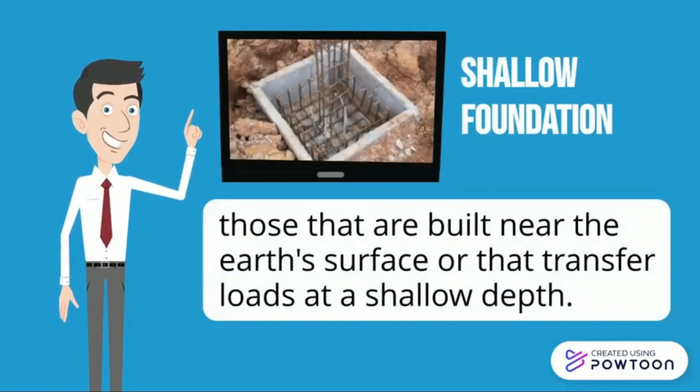Then we go to the definition. First, shallow foundation. Shallow foundations are those that are built near the earth's surface or that transfer loads at a shallow depth. Deep foundation refers to a foundation that is buried deeper or distributes load to a deeper strata. Then we go to their characteristics.

The first aspect that we consider is feasibility. The shallow foundation is easier to construct, while deep foundation has a more complex process. Next, the mechanism of load transfer: shallow foundation transfers loads mostly by end bearing, while deep foundation relies on both end bearing and skin friction, with few exceptions like end bearing piles.

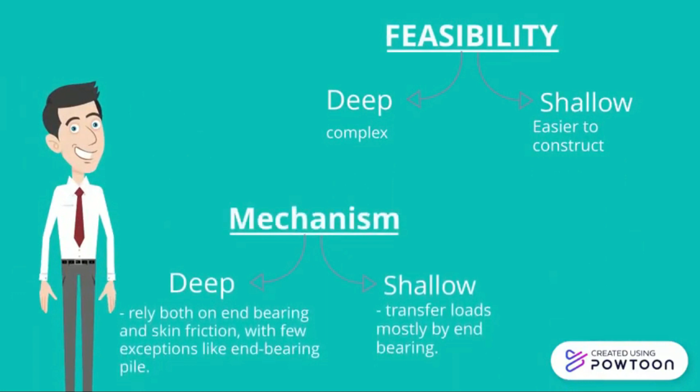Then the depth for shallow foundation is 3 meters, or the depth of foundation is less than the footing width, while for deep foundation the depth is greater than the shallow foundation. The cost of shallow foundation is cheaper compared with the cost of deep foundation, which is more expensive.

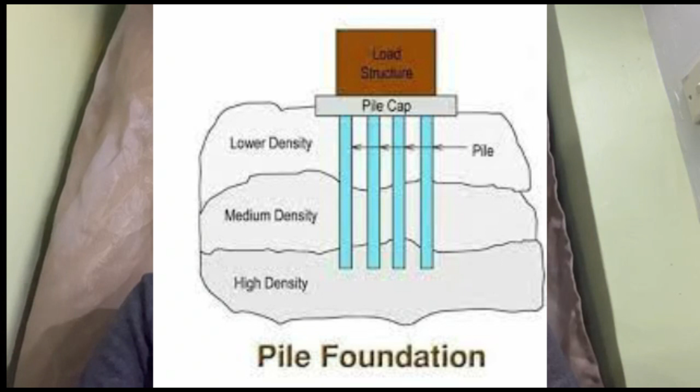Pile foundations are deep foundations that are formed by long, slender, columnar elements typically made from strong material such as steel or reinforced concrete, or sometimes timber. A foundation is described as a pile when its depth is more than 3 times its breadth, as it's inserted into the ground to transmit loads to a lower subsoil.

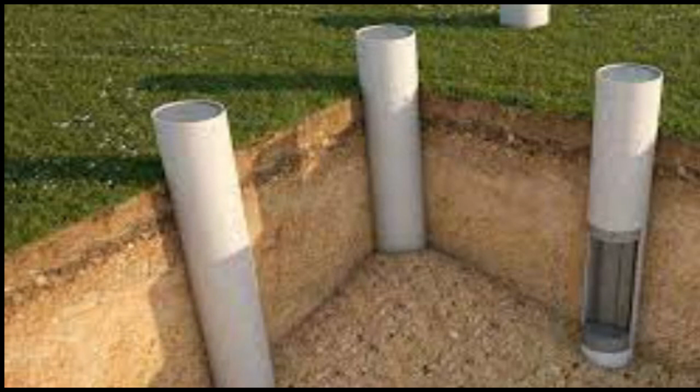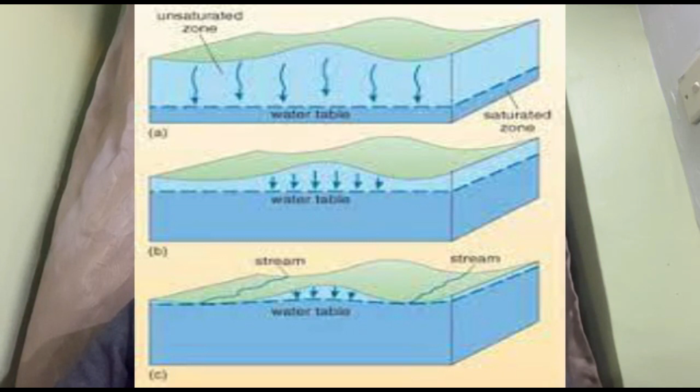Pile foundations are also usually used for large structures and in situations where the soil at shallow depth is not suitable to resist excessive settlement, resist uplift, or soil with a low bearing capacity. Firstly, the situations where we use pile foundations. The first one is when the groundwater table is high. The moisture of the soil is high and it must have a strong foundation to support the buildings.

The second one is the soil at the shallow depth is compressible, so we have to drill the foundation deep from the ground level. The next one, there is a canal or deep drainage system near the structure. Other types of foundation are costlier or not feasible, so we have no possibility of using another foundation when facing the construction area problem.

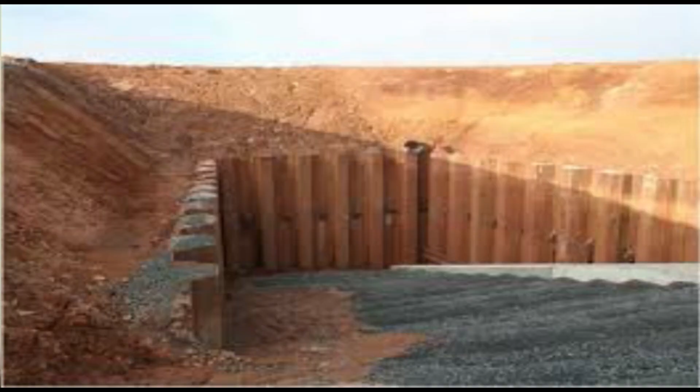The types of piling based on the function of piling. The first one is sheet piles. These types of pile are mostly used to provide lateral support. Usually, they resist lateral pressure from loose soil, flow of water and other problems.

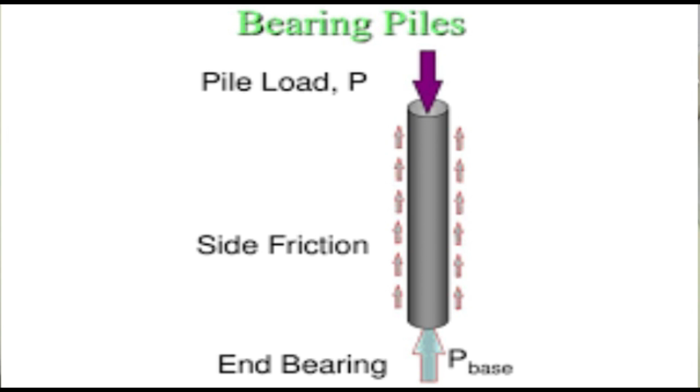Next, load-bearing piles. These types of pile foundation are mainly used to transfer the vertical loads from the structure to the soils. These foundations transmit load through the soil with piles supported properly onto a layer which is capable of bearing the load. The next one is end-bearing piles. In these types of piles, the loads pass through the lower tips of piles. The bottom end of the pile rests on a strong layer of soil or rock.

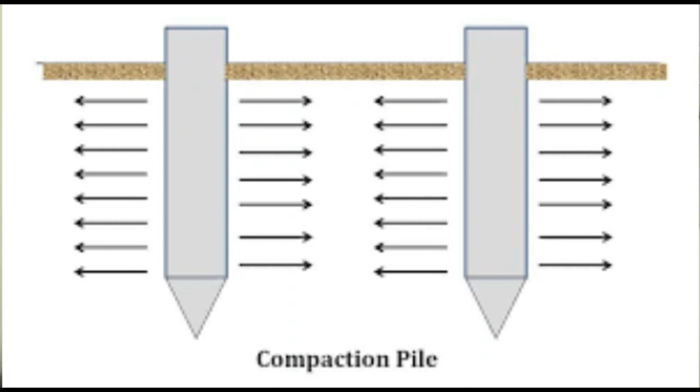Friction piles transfer the loads from the structure to the soil by friction between the surface of the pile and the soil surrounding the piles, such as stiff clay or sandy soils. Generally, the entire surface of the piles works to transfer the loads from the structure to the soil. The next one is soil compaction piles. Sometimes piles are driven at close intervals to increase the bearing capacity of soil by compacting.

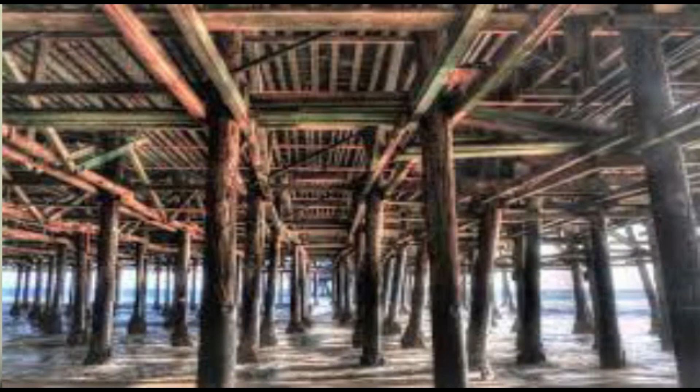Moving on to the types based on materials. The first one is timber piles. They last for approximately 30 years. They can be rectangular or circular in shape. Concrete piles provide high resistance to chemical and biological attacks and are usually built from high strength material. Next one is steel piles. They use a small section area. The piles are easy to drive. They are mostly used as end bearing piles, so they're easy to install.

The last one is composite piles. Piles of two different materials are driven one over the other so as to enable them to act together to perform the function as a single pile. From the sustainable elements, for the environment, the work of piling is very neat and clean. The second one is complete avoidance of dig excavations. Next, the piles can be pre-made in length, breadth and size according to site use.

The next one is it's the best for wetland areas, being aware of the fact that wetlands are very hard to handle or work with. For the social aspect, the first one is the safety of workers is guaranteed when working over water, as is the case with piles in jetties and wharf structures, which have a strong structure. And the second one is not disturbing neighborhood areas, as its noise level is low when driving concrete piles. For the economy, we can use piles in a place where drilling and holes are not done, so it will reduce the cost of drilling.

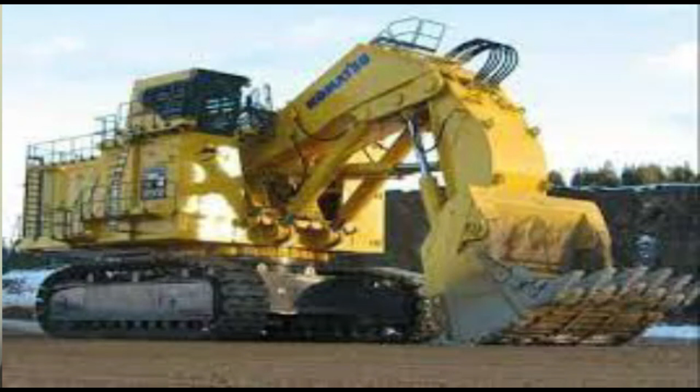Next one, the payout for the large machinery and trained laborers to operate it can be avoided. These things can be achieved by using screw pile foundations. Next one is the piles are comfortably handled and cut as much as you want by using the steel piles, so it's easier, not dependent on the budget for a certain size.

The piles also can carry heavy loads easily. Next one, they can be installed in a very large area. The last one is very inexpensive for timber piles because timber is abundant, hence these piles are economical.

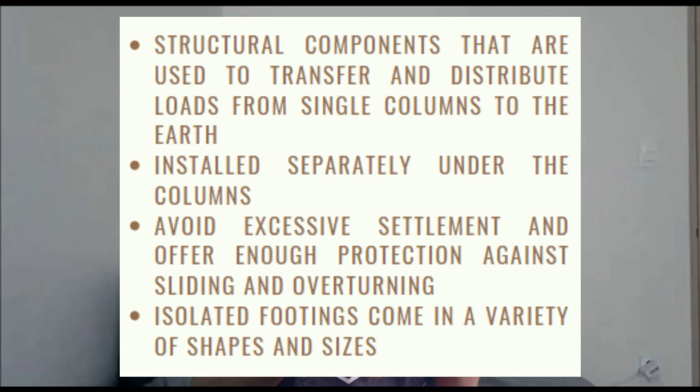Isolated footing comes in a variety of shapes and sizes. There are several types of isolated foundation that are commonly used in structural building: pad footing, stepped footing and slope footing. First, we talk about pad footing. Pad footing is the most common shallow foundation you will meet in any building construction.

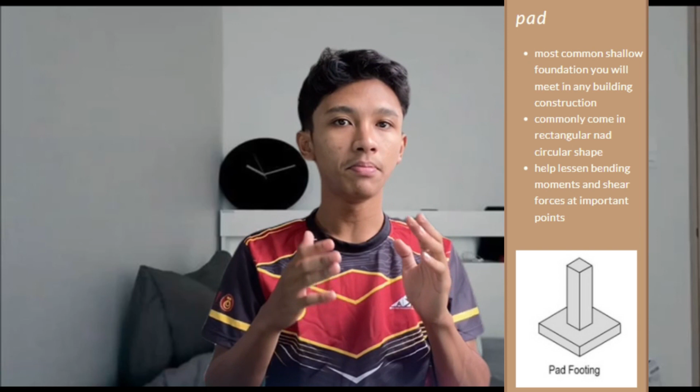This commonly comes in rectangular and circular shape, and this pad footing helps lessen bending moment and shear force at important points. Maybe someone wonders how the pad footing actually looks. So this is the picture of the pad footing.

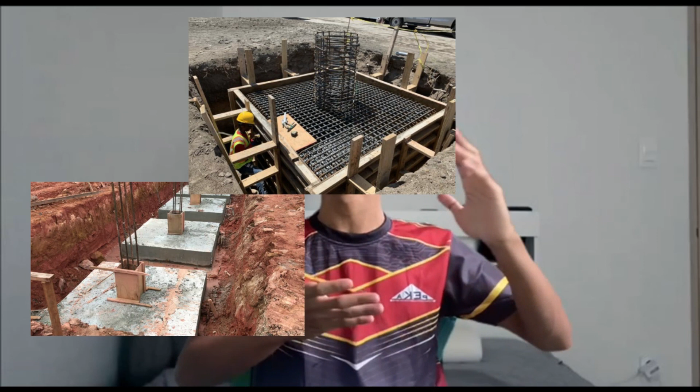The second type of footing is stepped footing. Stepped footing keeps the metal column away from direct contact with soil. Three concrete cross sections are typically piled on top of each other, and it is primarily used in residential building construction. This is how stepped footing looks like.

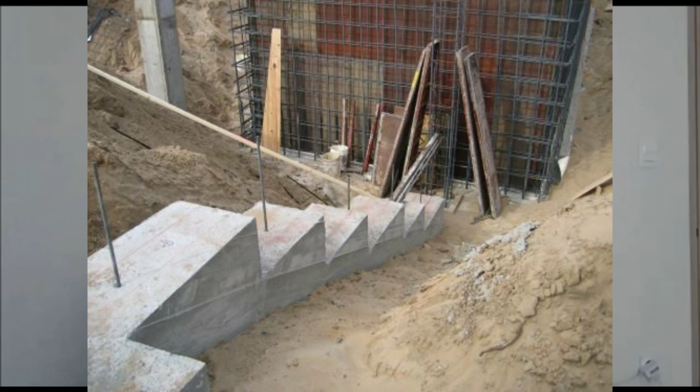The last common isolated foundation that we will discuss is slope footing. This type of foundation is designed and built to maintain a 45-degree slope on all sides. And this type of foundation reduces the use of concrete and reinforcement. So, when the concrete and reinforcement use is reduced, it also decreases the utilization of concrete and reinforcement. Slope footing is usually used in inclined surface construction. This is how it looks on construction site.

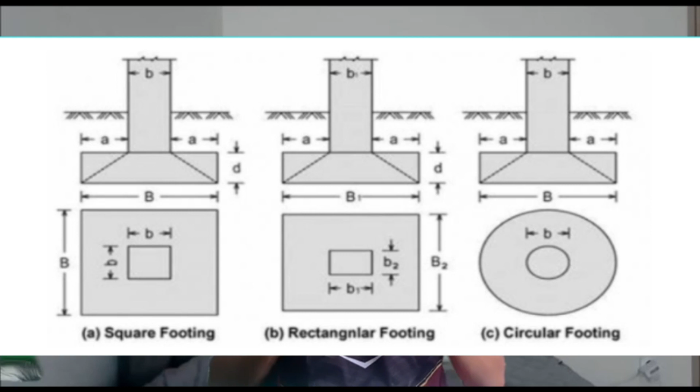As I mentioned before on the previous slide, there are several types of isolated footing. First is square, then rectangular and circular footing. Next, we will discuss the sustainable element in terms of environment. The first point is large excavation is not needed to construct this structure, so it can save more space and not disturb the environment around the site. Second point is less drilling is needed because it's only a shallow type of foundation, so it does not produce much waste,

sound and air pollution. Next sustainable element in terms of economy is it is a very cost-effective foundation, as the type of footing uses less reinforcement and concrete and also less machinery, so the cost can be reduced.

Last sustainable element in terms of social is, first, the design of isolated footing is simple to build and not heavy duty, as the construction does not need much energy and even unskilled or professional workers can construct it. Second point is the foundation holds the structure's load, making the structure strong enough for people and also providing safety for the user. That's all from me.

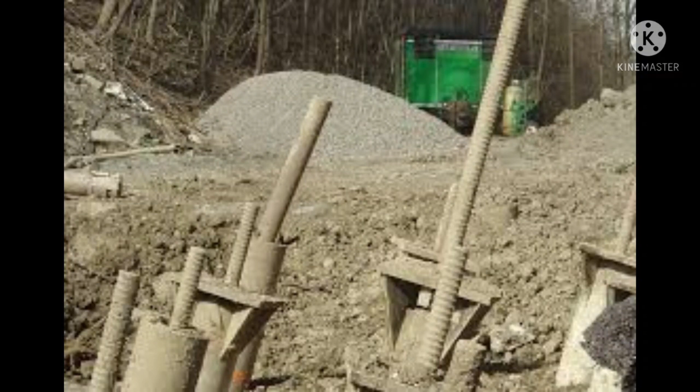Next, I will talk about the future deep and shallow foundation. Okay, for deep foundation, I think micropiles are the future for deep foundation. They are also known as mini piles. This type of piling consists of elements constructed with high quality, durable, small diameter steel casing or threaded bar. Micropiles help to underpin the foundation, minimize foundation settlement, and are the best option when installing in areas with difficult soil makeup.

Micropiles have many benefits. Some of them are that it is the most practical and cost efficient solution. It can easily be installed due to its compact, lightweight nature and is ideal for confined or remote areas. It can be installed at any angle and can also withstand axial and lateral load. Lastly, this process can reduce the time of installation compared to other types of deep foundations.

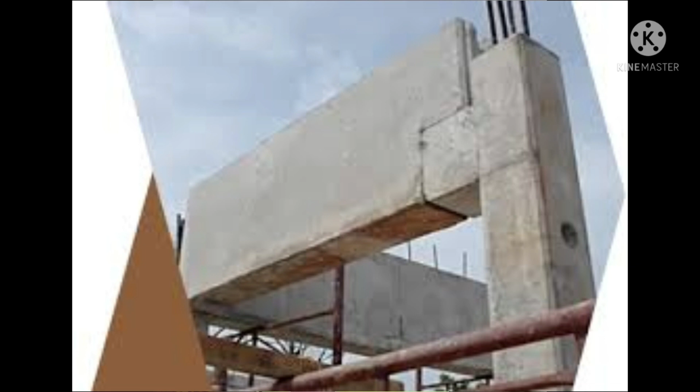For shallow foundation, I think industrialized building system is the best option for future foundation. Although it is not widely used yet, I think it is the best option we can use for future shallow foundation. IBS is a technical way of describing the construction of a building by fitting together pre-constructed parts made in a factory. It can produce better construction quality and productivity while reducing the risk related to occupational safety and health. This system also can mitigate issues of skilled workers and reliance on manual, foreign labour.

There are 5 types of IBS used in Malaysia. First is precast concrete system. Second, steel framing system. Third, steel formwork system. Fourth, timber framing system. And lastly, blockwork system.

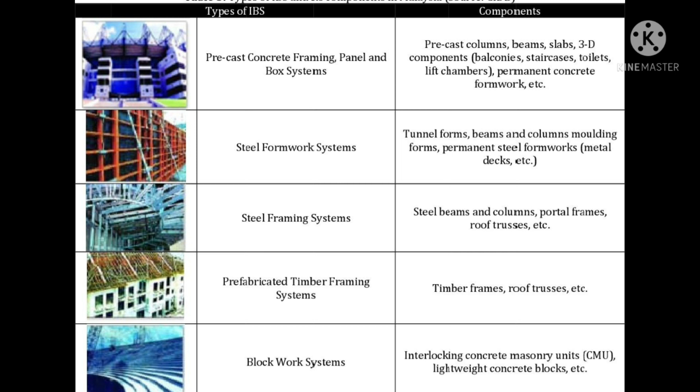The benefits if we use IBS for foundation. First, it is cost saving. It can reduce construction wastage. Second, it shortens the production time. The production of IBS components starts during the pre-construction period. Next, quality building. We will only use high quality components. And lastly, safe working environment, because IBS is like an assembly type operation.

Conclusion, deep and shallow foundation is very important because if the soil at the construction site is not strong, the building that we construct may be damaged or collapse. As civil engineers, we need to think of how we can improve the foundation in the future.